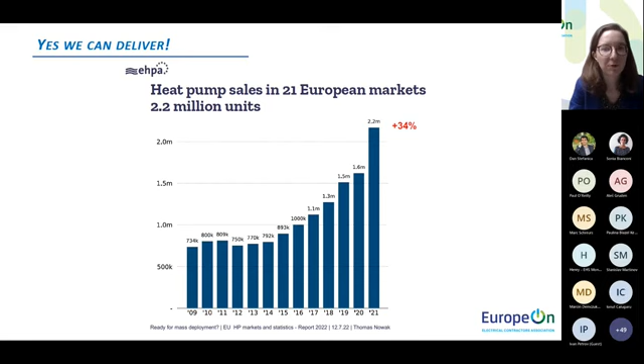One very last slide for me, please. It's about my expectations for today, because of course I know I remained quite policy oriented and a bit high level without any presumptuous comments from myself. So I'm really eager to listen to the other presenters on the different projects they are developing, which will be way more concrete. I just had a few expectations for today.

So just maybe to start a bit to engage with the next panelists: first, the need to think upstream. As I said, it's not just about training better the existing workforce - we need to broaden the pool of workers. Upskilling has some internal barriers, for example the lack of time of people to upskill, maybe the lack of financial means. So how do we deal with that?

Reskilling, that I mentioned already. Of course, we cannot overlook the complementary or so-called secondary skills, such as soft skills, system integration - how do you work between different trades, cross-skilling. I also think that interoperability is key, so that the trainings that are provided are agnostic. It's no use being trained in only using one type of heat pump. We really need to have savvy installers.

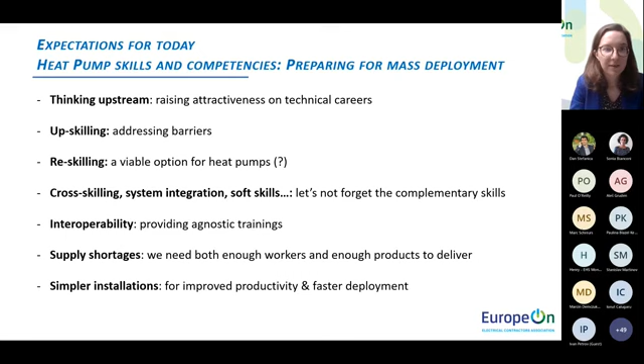So that's it, I just have a thank you slide. Thank you very much for your interest, and I'm eager to discuss with all of you, panelists and the public.

Thank you so much, Julie. Real food for thought there, I think, and a great way to start off this webinar.

So with that, I'm going to move to the next slide and introduce our next speaker, Stephen Murphy, lecturer and researcher at the Technological University of the Shannon. He mainly lectures in community energy and renewable energy, and his research topics range from heat pumps, retrofit and renewable energy to waste management and circular economy.

Stephen: Perfect, thank you Sarah, and thank you to EHPA as well for inviting me today. As it says there, I'm the leader of the HP for All project. It's a TUS project, we focus mainly on heat pumps. And I'd like to thank everyone as well today. And I'll just take control here and see, does it work? Yeah, so are you seeing the next slide?

Yes, that works. Perfect.

The HP for All project is a Horizon 2020 funded project, so European funding. The main ideas are to increase heat pump skills and also increase the demand for those skills. It's looking at the EU as a whole, but it's kind of the first pilot of this kind of approach.

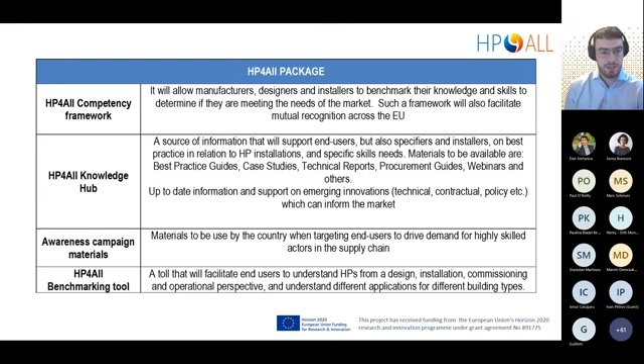Just a quick overview of the impacts we're looking at for the HP for All project. I can happily say we've reached our targets. The impacts are based on training of installers, designers, specifiers, procurement officers, policymakers, and obviously end users too.

We have primary energy savings from this project of 2 gigawatt-hours per year, based on a calculation I won't get into now, and also renewable production of 1.95 gigawatt-hours per year, and a reduction of 628 tons of carbon per year.

We've over 400 people trained - I think the latest figure is over 500, it could be more, but around that. So yeah, 400 people trained in 3 pilot regions. Each region has its own approach, because each has different stakeholders, different market maturity, and in our case, 3 separate languages as well.

You had to create the resources and materials based on your stakeholders and your market as well. So this is coming into our replication plan. We're going to take this information that each market is different. One shoe doesn't fit all. There's work to be done to find what shoe to put on.

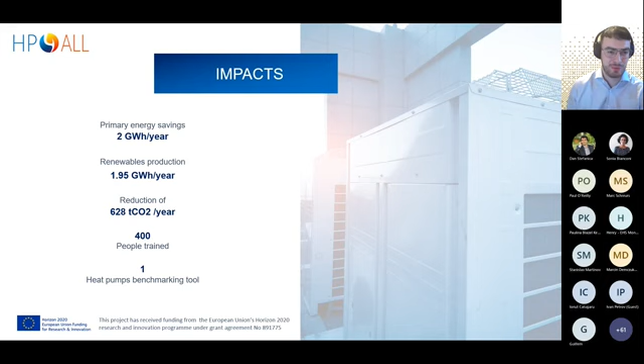Just an overview of the partners. We have EHPA - again, thank you for today. CTA, they're based in Andalusia. TUS, that's ourselves. IERC, based in Cork in Ireland. RENA, based in Italy. ESV, or Energy Spar - my German's terrible - from Austria, and Sustainable Innovations from Spain. We've worked 30 months with each other, and I think we make a good team, a very open team, and a very hard-working team as well. It's been a pleasure for the last 30 months, and here's hoping that we'll find more funding for this project going forward.

So today, to talk a bit more about heat pump skills and competencies, just a bit of background first.

Another main output of this project, aside from the heat pump skills and competency framework, is the notion of mutual recognition of skills across Europe. I'd say it's a touchy subject, and also it's a difficult subject to pinpoint. We'll go through a bit of background first, and then discuss how the HP for All project aims at addressing this.

Each EU member state sets out its own national system of education and training, for every single EU member state. This leads to its own professional qualifications, whether it be apprenticeships - some member states have guilds, others have courses that people can do. The EU has systems for recognizing these skills that enable professionals to make full use of their training so they can work in another country. Basically, a professional qualified person from one country is qualified to work in another country.

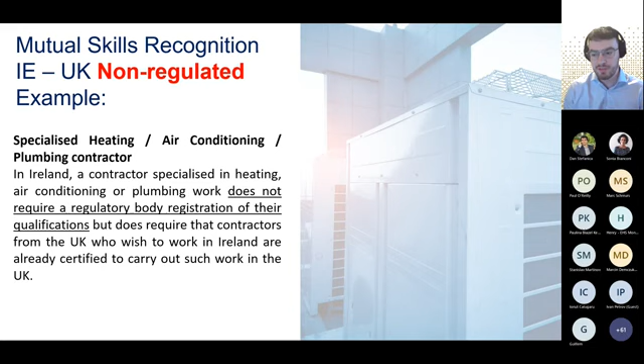So in Ireland, if you're a specialized contractor in heating, air conditioning, or plumbing, you don't require your qualifications to be checked by a regulatory body, but you do require that you already have certification in the United Kingdom. So if you're certified in England, you can kind of work in Ireland, but it's not really written anywhere — it's kind of just an industry tick, saying, yeah, if you have it over there, that's fine.

Then you have a regulated body — for example, an air conditioning professional. I gave the example of the electrical contractor before; now we're looking at an air conditioning professional. A qualified contractor based in another European Union country, or the United Kingdom, is required to provide proof of qualifications in refrigeration, whether that's an apprenticeship in refrigeration or

mainly a National Craft Certificate level of around 6 in Ireland, which I think is around level 5 in the European framework. The contractor also must be F-gas compliant. All this documentation has to be checked by a regulatory body in order for this person to work in Ireland, and that's the main difference between the two.

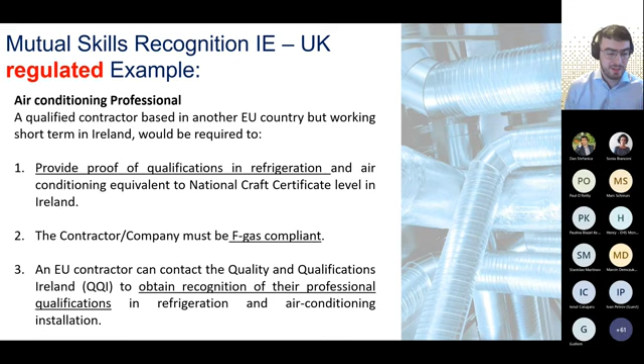So there are some trades with this unspoken law — if you have one qualification, you have the other. But with regulated trades there's more nuance, or rather, there can be more issues if it's not done correctly. For example, air conditioning with refrigerants — if refrigerants leak, that's a big problem especially for emissions. That's why it's regulated: to ensure a competent person handles it and reduce the likelihood of leaks.

So how does HP for All want to get into this minefield that is mutual recognition of skills? We can't directly force competency bodies, third-level educations, or apprenticeships to sign a waiver saying anyone who works in Ireland in heat pumps can work in Austria, for example. It's too complicated for that — there are too many actors involved. This is more of a start on the road to mutual recognition.

So the agreement is signed by the HP for All project representative and another regional actor. The document is intended to commence a dialogue with the objective of mutual recognition of skills, so heat pump skills gained in one region can be recognized in another. I've put in there that it's not legally binding in any way—it's just a start on this road to mutual recognition.

There can be various ways to do it. It doesn't have to be that apprenticeship people talk to our apprenticeship people, come together and say the syllabus is pretty similar, we can sign off on that. It can also be things like an EU-wide academy. We'll have all options open—there's no point focusing on one way of doing it. There has to be multiple ways of doing this.

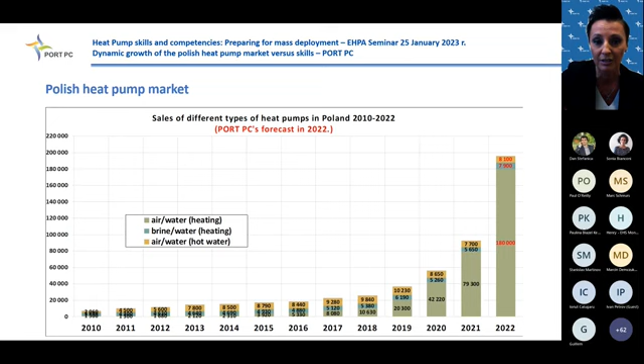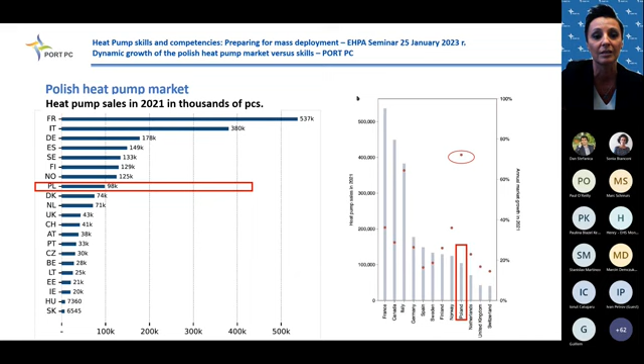This was the forecast, but if we look at last year's sales of heat pumps in Poland, we can see it was more than 90,000 units. If you look at the increase, it was also quite big, more than 70% increase of the market. So we can see that our country, after 2022, could be really high if we speak about statistics of heat pump sales in Europe.

This slide shows the increase of heat pump sales in countries in Europe after the first half of 2022. You can see how it looks in different countries, and of course Poland is here. It was estimated that sales increased about 136%.

But after the fourth quarter of 2022, we can observe that the sales of heat pumps slowed down a bit. We estimate that sales won't increase as much as after the first half of the year, but it will still be a quite big growth, because 122% is a big growth, hyper growth of the heat pump market. And I think Poland could be number one if we speak about such a big increase.

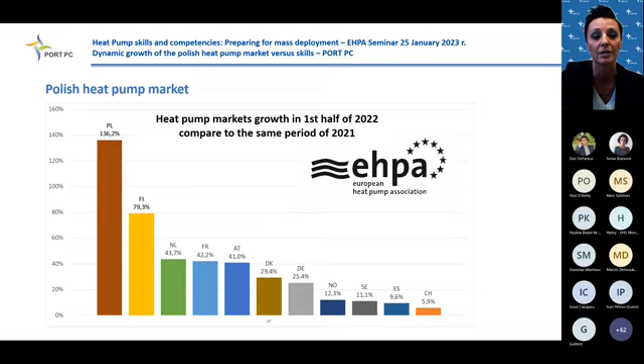Why is that? Why did that happen in 2022? There are some main drivers of the hyper growth in Poland, but first I will choose the impact of subsidies, the finance support in Poland right now, because we have a few programs that are really attractive for the end user, for investors, especially in the residential market. We have 3 main subsidy programs.

The first one is retrofit tax relief. It is not a subsidy or grant, but a deduction of expenses for retrofitting investments from the amount of income tax calculating base. So according to that, people can save some money for retrofit activities in their houses.

The main program we have right now is Clean Air. Clean Air subsidy is for renovation, so you can exchange the old boiler for a new one that fulfills eco-design requirements, but mainly people choose heat pumps, especially last year, and I will show you at the next slide how it looks with the share of heat pumps in subsidy applications.

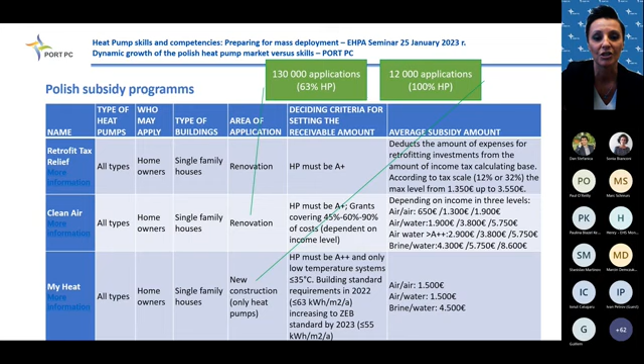So they have to meet the requirement of less than 55 kilowatt hour per square meter per year for their buildings. So we will just help to make the new buildings as energy saving as possible.

And if we speak about this statistics, here you have the graph that shows the share of heat pumps in applications for subsidy in the Clean Air Subsidy program, for retrofit houses, for renovation.

You can see that something happened, as everybody knows what happened in February. Since February, there is a big change in the share of heat pumps in applications. At the beginning, heat pumps had nearly 25%, 28% of the share in applications for subsidy, and then it goes up to 60% right now. In the second half of the year, every month we reached more than 60% share of heat pumps in the applications for subsidy.

If you look at the yellow line, this is for gas boilers. At the beginning, gas boilers were the main source chosen in this clean air program for renovation of houses, it was 40% of share in the applications, and then it goes down to 20%, and it was kept there during the second half of the year.

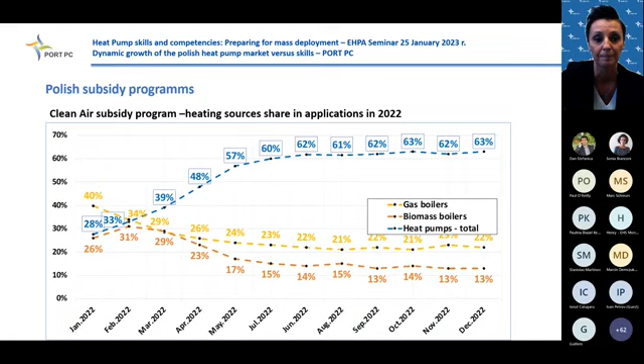So to look at the situation in Poland, there is a graph that shows that in Poland in 2018, the main heating source was the coal boiler, and then gas boiler, and also pellet boilers, and then at the top of the pyramid, with the small amount of units installed, it was heat pumps.

Then the situation changed in 2020. We can see that coal boilers decreased, gas boilers stayed at a high level, and pellet boilers also made quite big increases. And of course heat pumps started to increase, and we can speak about this big boom for heat pumps in Poland since 2020.

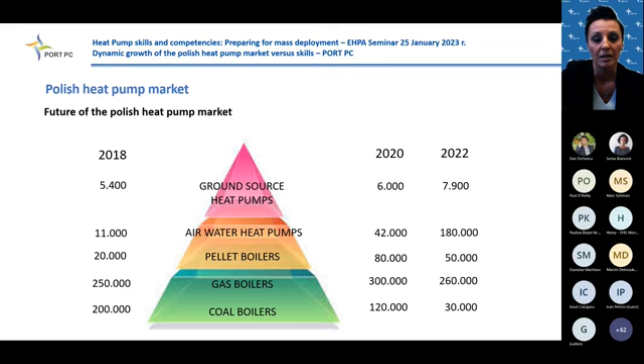And then in 2022, you can see that there is a quite big decrease in fossil fuel boiler installations, and also a little decrease in pellet boilers. But you can see that heat pumps were pushed to the top level of the pyramid. So this is the situation right now, and I hope it will be stable for the next 10 years.

Yeah, this was the statistics for our market. And now I want to tell you about some good practices that we will have in Poland.

First of all, I want to tell you about the project of industry skills centers. It is a new project, implemented in September 2022 as a competition for institutes to establish such skills centers. Right now there will be the end of this competition, and we will know how many and who will manage these skill centers.

As PORT PC, the Polish organization of heat pump technology development, we also will apply for the financing of such a training center. The plan for this year is at least 20 such training centers created by the end of 2023, and another 100 centers by the end of 2024. In this project, 120 fields were defined, and one center will be established in the region.

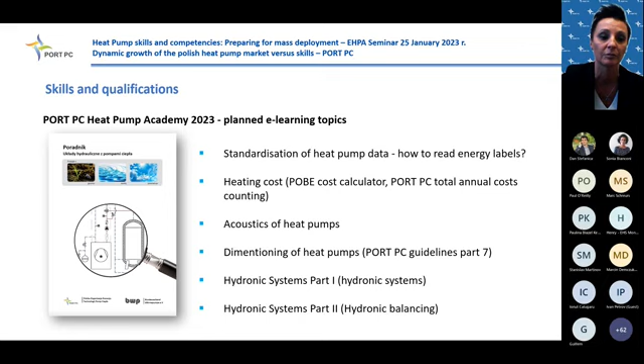If we speak about this standardization of data provided by heat pump manufacturers, it's a really important topic in Poland right now, because last year many new brands appeared in Poland, and in some cases it's quite hard to find energy labels or product fiches for the heat pumps. So it's really important to push everybody to use the same data.

So for sure we will promote the heat pump keymark and EHPA quality schemes in Poland, and we will push everybody to use product labels and energy labels. Everybody should have access to the PDF files with these parameters - for example, energy class, ETA S, SCOP in cold and average climate zones, sound power level, and heating power. All these parameters should be taken from the product label and energy label, to speak with the same voice and the same standards.

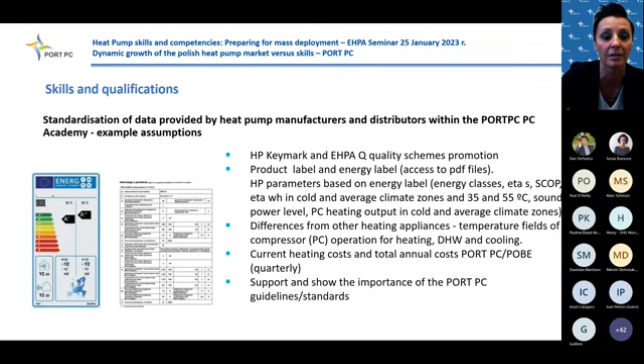We want to support and show the importance of our guidelines and standards that we established over the last 10 years through the Polish Heat Pump Organization. So this was my presentation - this is the last slide.

Thank you very much once again for the invitation. I was happy to show you how it was in Poland, because right now everybody is asking what is going on, what has happened, why there is quite a big boom in heat pumps in Poland, and everybody is wondering if next year we will still have the same big increase in our market. So thank you very much.

Thank you so much, Gosia. Very interesting indeed to have that insight into what's happening in Poland and to get some context on that. So thank you.

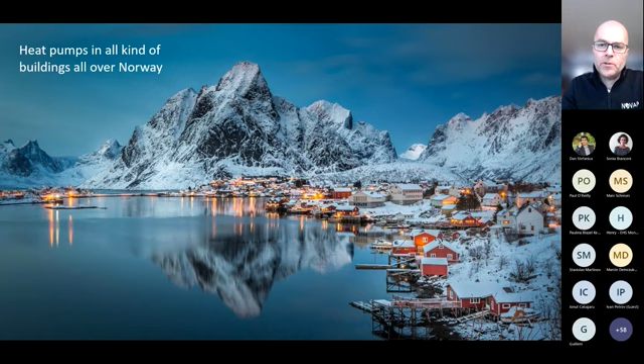So I'm going to say a little bit about some success factors for heat pumps in Norway. There are lots of different drivers for using heat pumps in Norway: prices, ban of fossil fuels, etc. But we have, together with the other Nordic countries, been quite demanding towards the manufacturers from both Europe and Asia. So we have high quality heat pumps for cold climate dominating our market. Many of these heat pumps are more expensive than what you find in other European countries because they have to work at really cold conditions.

We have a large network of skilled installers throughout the country, especially when it comes to air-to-air, and I will show you statistics in a few minutes that show that when it comes to numbers of installations, air-to-air heat pumps are dominating in Norway. The challenges we have are especially with air-to-water and brine-to-water heat pumps. They are costly, as in the rest of Europe, and many end consumers, both in private households and commercial buildings, regard them as expensive, even if they are profitable.

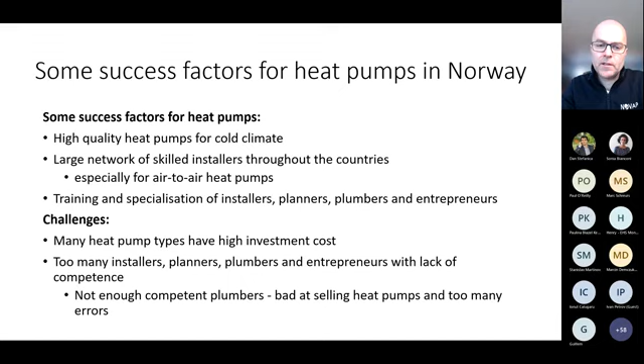A little explanation about the heating system in Norway. I'm not going to go into detail, but what you see in green is use of electricity. In industrial processes, we still have a lot of fossil oil, coal, and gas for some industrial processes and heating, but electricity is common in many industrial processes, and heat pumps are getting more and more common in several of them. When it comes to heating in all kinds of buildings, electricity is

the main heating source together with electric heat pumps. You will see the same in Sweden and Finland too. Of course, there you will see more district heating than in Norway. We also have district heating, but not as much as in those countries and in Denmark. But we differ a lot from the rest of Europe since we have a much larger share of renewable energy - like 98% of our electricity is renewable. So electric heating is much more common in Norway compared to the rest of Europe, where gas or district heating from fossil sources are dominating for the moment.

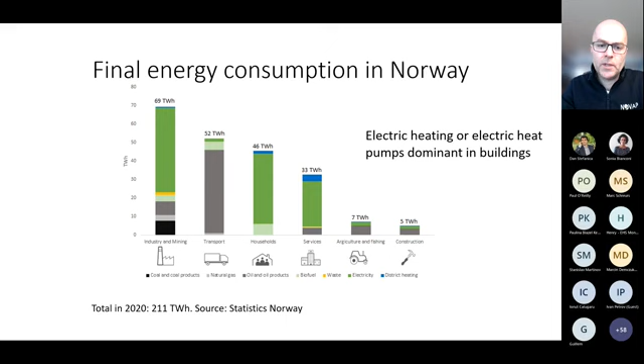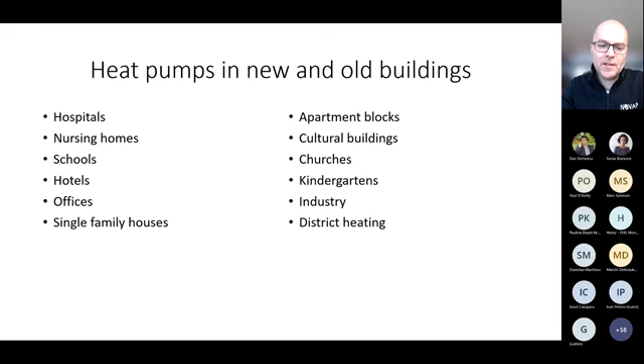As I said, we have heat pumps in all kinds of new and old buildings. I'm not going to list them all, but as you see, there are lots of different buildings where heat pumps are common. This is our sales development. I haven't included the 2022 figures yet because they will be official later this week, but we have a growth of 25%. As you see in blue, that is air-to-air heat pumps, so air-to-air heat pumps are dominating.

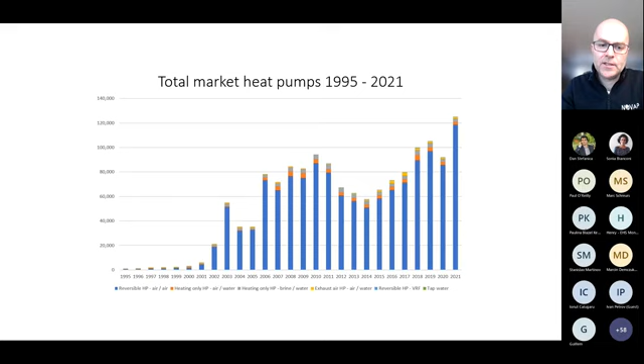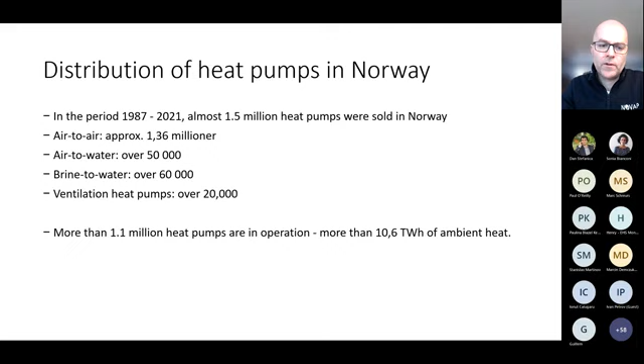We have a much smaller market for heat pumps for hydronic systems in Norway because of building codes. Most buildings have direct electric heating, and we don't have as many buildings with waterborne or hydronic heating systems as in the rest of Europe. This is something we try to change. So here you see the figures on the amount of heat pumps sold until 2021. You see that air-to-air heat pumps are dominating. Of course, we also have air-to-water and brine-to-water, but the share is much smaller than, for instance, in Sweden and Finland. They also have lots of air-to-air heat pumps, but they have much more air-to-water and brine-to-water heat pumps also.

So just to show some pictures of air-to-air heat pumps, for many of our European colleagues, it seems strange that we have so much air-to-air heat pumps in a cold country as Norway, but the air-to-air heat pumps that dominate in Norway are high-quality heat pumps that work down to -25, and the COP is quite good, actually down to -15 or -20. But of course, in an old, not well-insulated house, air-to-air heat pumps cannot be the only heating source. So very often, air-to-air heat pump is an important heating source, but we have direct electric heating or use of wood stoves as additional heating.

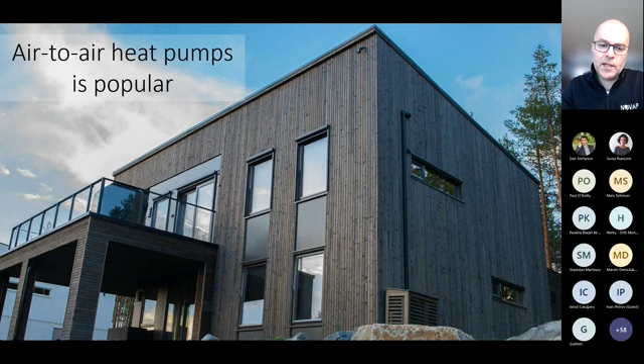But in small energy efficient houses, quite often an air-to-air heat pump is the main heating source throughout the whole year, and it's only at the coldest days that you need additional heating. But that depends on the size of the house and how well insulated it is.

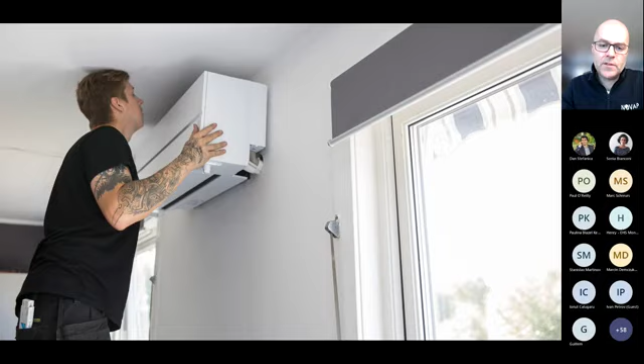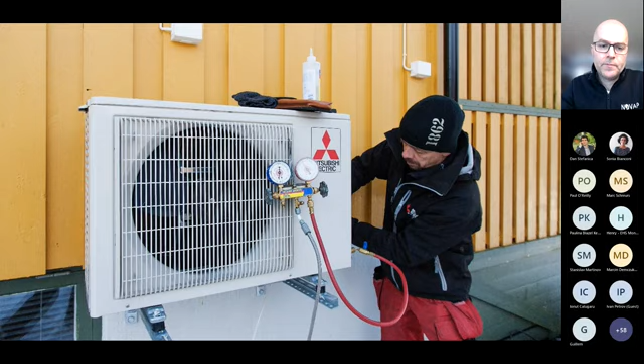So here you see a common air-to-air heat pump. More and more people use them also for cooling during summer, but it's mainly bought as a heating device. In many other European countries, they are mainly used for air conditioning, but in Norway, the driving market is for heating. So you have wall hanging units and you have floor mounted heat pumps. This is a common outdoor unit. More and more mountain cabins have them, so of course they have to work where there's lots of snow and where it's cold.

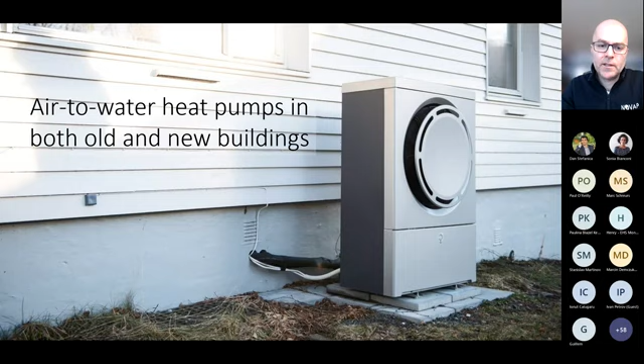And of course we also have air-to-water heat pumps in both new and old buildings. Ground source heat pumps are normally more robust in old buildings with high temperature heating systems. We have drilling or drillers all over Norway for all kinds of buildings.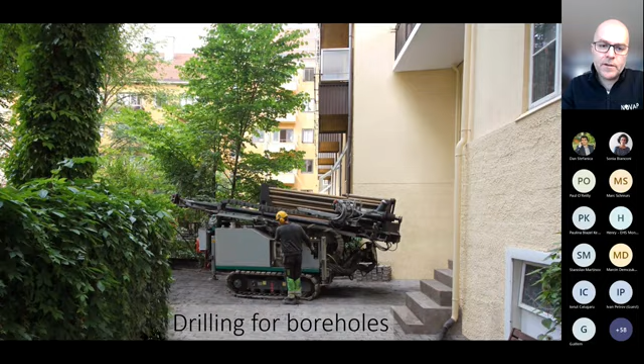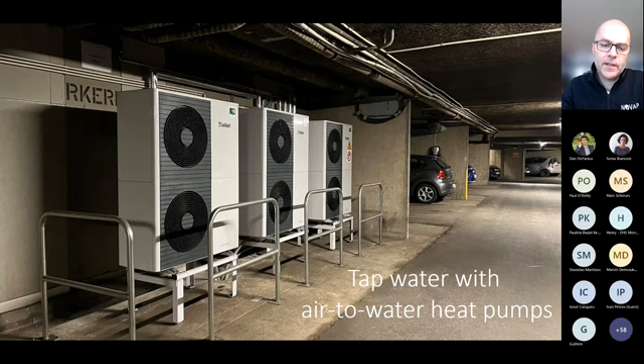This is for a multi-family building. This is for a single family building. This is a common technical room in an old multi-family building where there used to be an oil burner. Now instead there's a heat pump that heats the whole multi-family building. This is from a garage where it collects exhaust heat and heats up all the tap water.

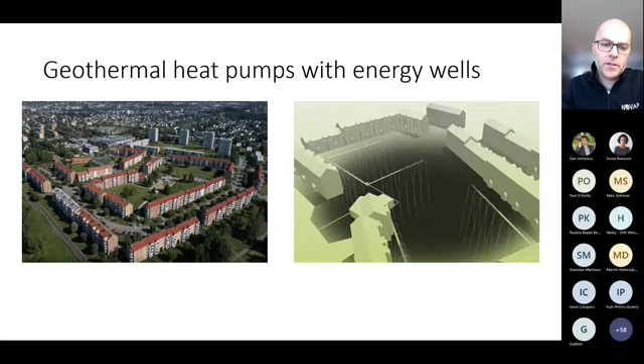And this is one of the largest multifamily house areas in Norway. They have one common energy well for all the buildings, but we have lots of energy wells all over Norway. And this is an ammonia heat pump from a new energy efficient big building.

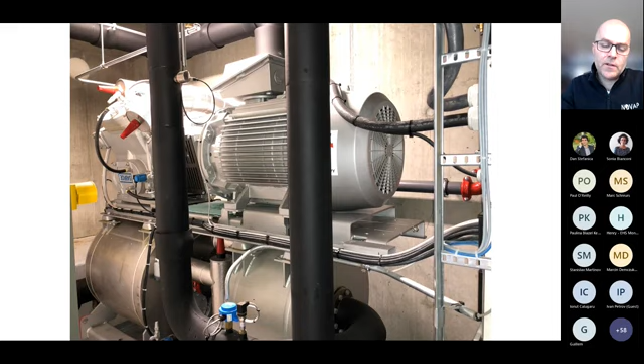So the reason why I show all these buildings is to show you that the heat pump market is quite diverse. So you have some installers that only work with small air-to-air heat pumps and others that are skilled and work with more complex heat pumps, and some are also specialized only on natural refrigerants. And also you have the large industrial heat pumps and large heat pumps that we have in district heating.

So who is doing what? Because quite often we talk only about the installers, but you have engineers that design the heating systems in larger buildings, and you have heat pump engineers that are specialized on the heat pump itself, but they might not be specialized on how to design a good hydronic or heating system. You have lots of engineers and plumbers that are designing heating systems that don't necessarily know the conditions that are needed for a good heat pump system.

You have lots, unfortunately too many, plumbers that don't have sufficient training in heating systems and heat pumps, even if they are doing installations. Quite often they just get support over the phone from some of the importers, but too many of them don't have the necessary skills to do good installations. And you have refrigeration and heat pump technicians that normally specialize on larger heat pumps, refrigeration systems, freezers, and many of them don't work with heat pumps for households.

So the market for air-to-air heat pumps is dominated by installers that are electricians or that have other kinds of backgrounds, who have been to our or other members' courses to learn how to install heat pumps. Those that are specialized on heat pumps, that are educated in heat pumps, they normally work with larger systems. Of course, some of them also install smaller heat pumps, but the market for smaller heat pumps is normally dominated by either plumbers or electricians and others that have just been doing training courses. They are not necessarily educated.

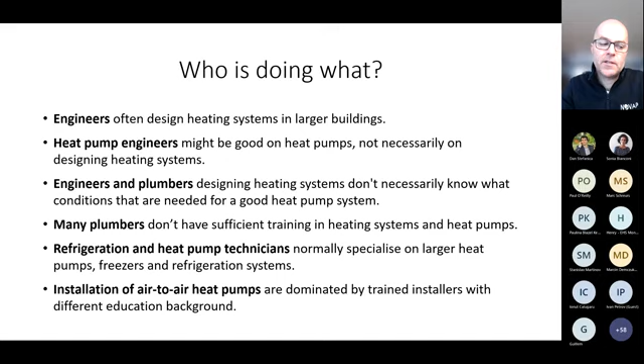So what do we have in public education in Norway? We have a vocational education system where you have the 2 first years - we have different kinds of vocational education, for electricians and plumbers and different kinds of professions, but this is for the refrigeration and cold and heat pump technicians. So the 2 first years is the common education for working with refrigeration, heat pumps, and ventilation, and then they get more specialized in the 3rd and 4th years, when they are a trainee out in a company.

It's also possible to have fewer years, only 1 year at school, and then they do the rest of the education at the company with guidance. It's also possible actually to do all the education at the company, but this is the most normal way to educate themselves. And what they do, they are specialized on heat pump and refrigeration technology.

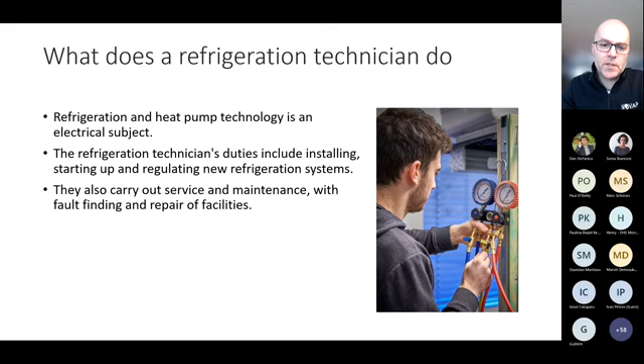So they are learning installing, how to start up and regulate and do maintenance on these heat pumps and refrigeration systems. And also we have the plumbers.

They have the same education system, but they have a half a year longer apprenticeship. So they either have 2-year education, 1-year education, or 4.5 year trainee, being a trainee. But what is a challenge is that the education system for plumbers for the moment is not good enough for heat pumps and hydronic systems.

So they are depending on doing courses and being trained after the education. And also, after you have become a plumber or a heat pump technician, you can go to a technical college for 2 more years. And you need some extra education to go further for an engineer degree.

Or there are also, of course, lots of students that had all kinds of background that go directly to a bachelor degree or master degree in heat pump engineering. So what do we do?

I will show this short. Since 2000, we have had different kinds of training systems. We started with a general theoretical education system. Sorry, it's Siri that's talking to me. Sorry. So we had a training system that was theoretical from 2000.

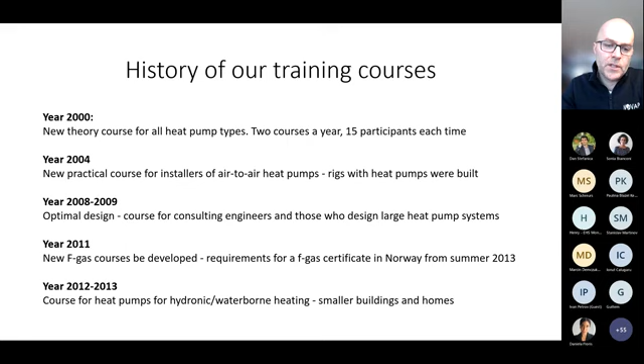So we introduced our F-gas courses in 2011, and then we have had courses for hydronic systems from 2012. So we are the largest training provider for heat pumps in Norway. Lots of people go through our website where they can find our courses. I will show some of them.

For the moment, we have 10 different courses and 4 more being established. So the most popular course is the F-gas regulation course, because if you're working with several kinds of heat pumps, you need that kind of certificate.

And we are kind of strict, so you are not allowed to do our F-gas training or take the exam without having the proper formal education from before. If not, you have to do our basic air-to-air heat pump installation course.

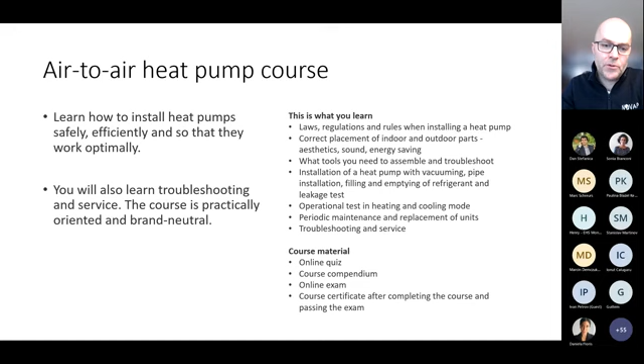And then we have lots of other courses too, but I will just show a few of them. So we have an air-to-air heat pump course where you actually learn what you need to do when you plan, install, and maintain an air-to-air heat pump. It shows here what you learn and what kind of material you get, and you can go through this presentation later if you want to look at the slides.

And we also have courses for flammable refrigerants, because we see that the use of flammable refrigerants is growing rapidly in Norway. We are doing a lot of cooperation with others, so several actors are using our training material, and several actors are doing marketing on training courses. They tell installers to go to our training courses, or do our training with some of the actors we cooperate with. Last year, together with cooperating association actors, we trained 1,100 persons on different kinds of courses.

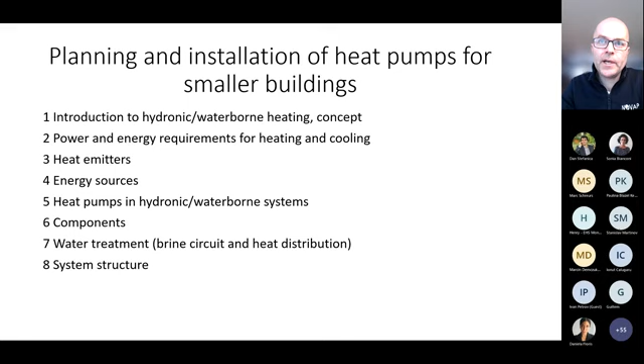So in short, to end up, we are working with new courses also, a new course on heat pumps for hydronic systems, and the training that we have. Yeah, I will show you just shortly.

We are also working on making guidelines for different kinds of buildings, and for some years in the former education committee that EHPA had a cooperation with other countries to try to find out what kind of training courses do you have, how many days are the courses, and what topics are covered.

I will not use more time now, but there are challenges: there should be more mandatory certification schemes in Europe. We don't have that, so we are discussing now our training courses, how strict the exams should be, and how we can attract more people to take our courses.

And we also have big consumer websites, and we try to stress all the time that there is too much focus only on the heat pump itself, but it's at least as important that you have a good installation. Then you need skilled installers. Okay, thank you, I will end there.